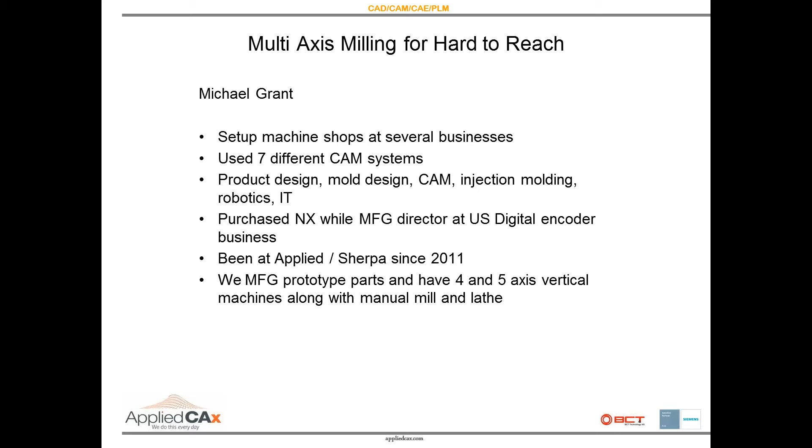Our experience here, what we do here, is more prototype. Complex parts all over the place, not necessarily one type of product. So we do anywhere from vacuum molds to complex fixtures, and aerospace. We cover pretty much all the industries. That definitely helps us see the different challenges.

And keeps it fun. One of the fun projects I've been working on lately is taking a vacuum mold that someone else made that needs modified, doing CMM and then doing modifications on it. Not everything's designed on it, so having to add features, and also finding that some faces are off as much as 40 to 50 thousandths per side, but able to finish that up with just matching everything up. And I'm really enjoying that.

I like facing new challenges. So I'm not an expert in everything, and I definitely learn from you guys all the time. Keep an open mind - I'm not here to tell you there's only one way. I just like to share what I know, share my experience, and hopefully you get something from that. It's always great to brainstorm. So anytime you have deeper questions, or want to look deeper into your situation, definitely reach out to us, and we can partner with you and work through it.

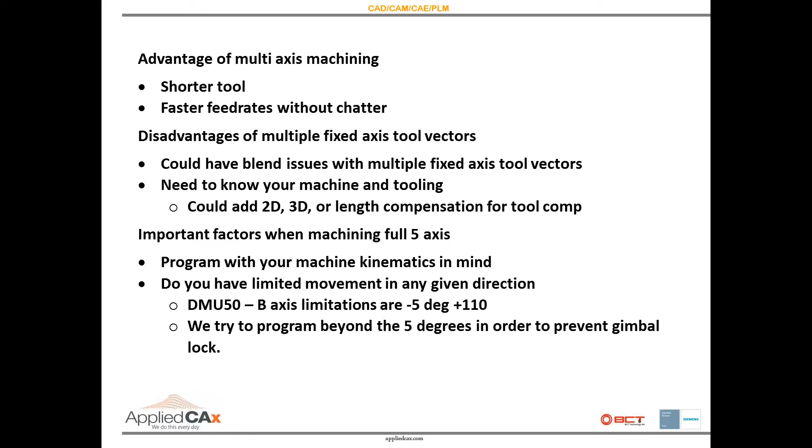But yeah, that's pretty much all I've got for the slides. I know how much people enjoy slides, or how much I enjoy slides, but just wanted to give some important points there.

So one of the challenges in demonstrations is finding - we have some really cool projects we work on that I'd love to share, but they're customer products. So I tend to go out to GrabCAD and look for some non-licensed models that I can share, and then I can modify them from there, of course, with NX. So here I've got a mold with some deep pockets, small radiuses, hard to reach areas. There's certainly situations where you would also use this on something where your movement's outside of a cavity, maybe a core or an aerospace type of part.

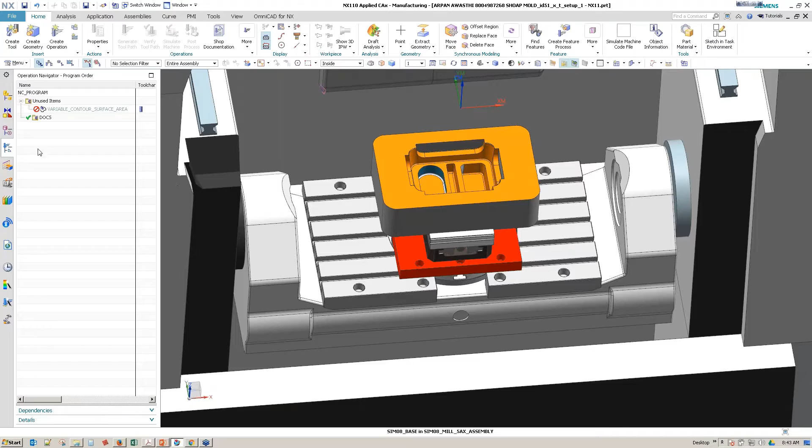But here, as you can see, I have it set up in a simulation kit. So this is a sim kit attached to the setup file for NX. So this has the kinematics, the post all attached, and they're communicating with each other. And this really improves the way that it resolves kinematics and shortest moves. So this is G-code simulation. It's not simulating the internal code.

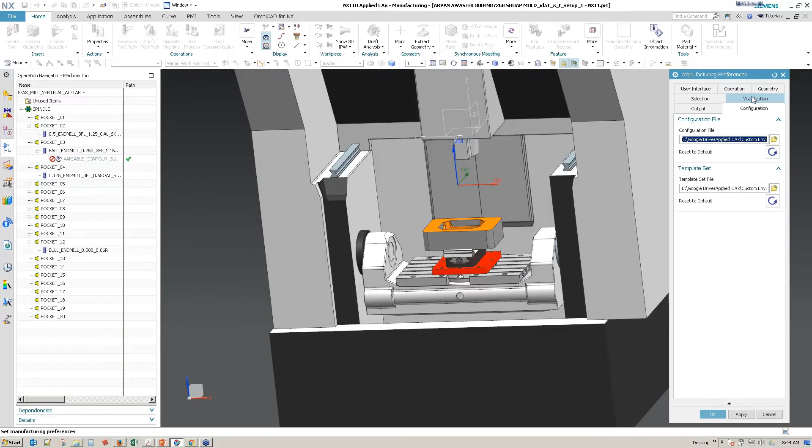And just to show for those who haven't seen it here, a little movement. So you got all your kinematics movement here in this particular kit. This is a table-table, so both rotaries are on the table. NX also allows you to look at your movements prior to doing a toolpath. So some people find this helpful for looking at your tool length and what tool might be best to get into a certain area.

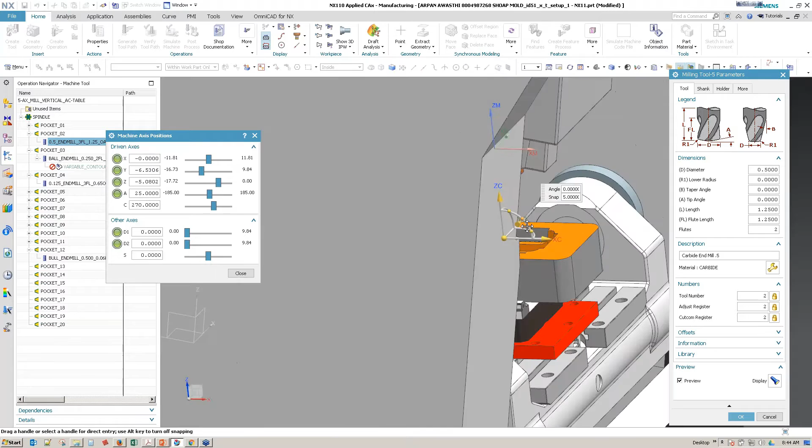So here I just double-clicked on a tool in my tool navigator where I can see all the tools I have assigned to different pockets of the machine. And as I drag this around, the machine's actually moving with it. So if I wanted to see what it might look like, I'll hide it for a moment to get down in here. Of course, this isn't the cutter I would use, but it just gives you an idea of, hey, is my holder going to have any collision issues? Is the tool long enough? What size?

It just gives you some diagnostics to look at, and this might be handy even for quoting. Setting up this file in here, it can be a template, so it's not difficult. So if you're not familiar with that part of NX, certainly let us know, and we can demonstrate more about the simulation kit, as we call it. But that's not what I'm really getting into here. Just wanted to give a little short overview.

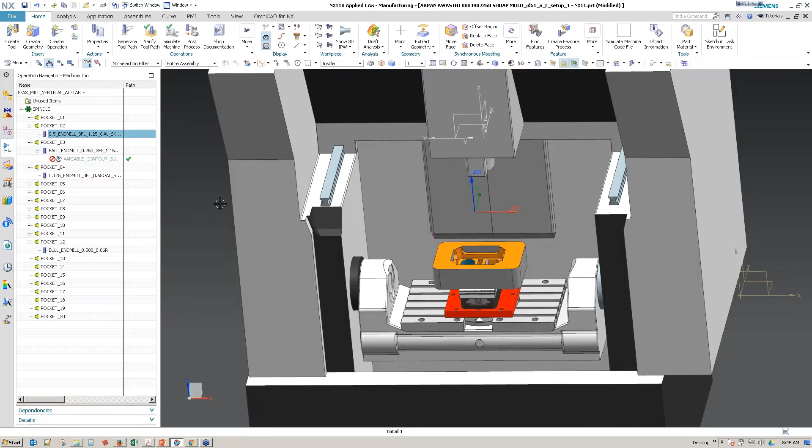So here we're going to look at different ways of creating your multi-axis tool vectors. We've got this closed half-open pocket here. It's got the wall there with a small radius. So this is a little bit challenging to reach, certainly in the case of maybe a 3-axis machine where your cutter is going to be much longer. You're going to want a smaller radius, probably a ball mill to be able to go up that wall.

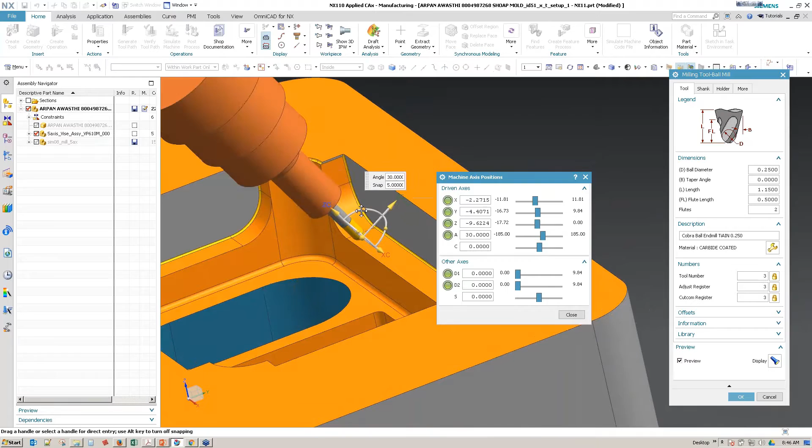So a 5-axis can be handy in this situation, just to be able to tilt. You could resolve this with fixed-axis machining where you just tilt enough to get your holder away from the wall and then work it down. So I'll start there, and then we'll dive into the full 5-axis. Kind of work our way down here.

So I've got this set up so that we don't have to go over roughing. I've just got the part set up; of course, it's seeing the 3D geometry for the part, and then for the blank, I just have offset from part, kind of like if you had gotten a casting. So what we normally do in this situation is we'd work it down with a ball mill, and then in the end, we would do a smaller ball mill tilted until we get that blend down.

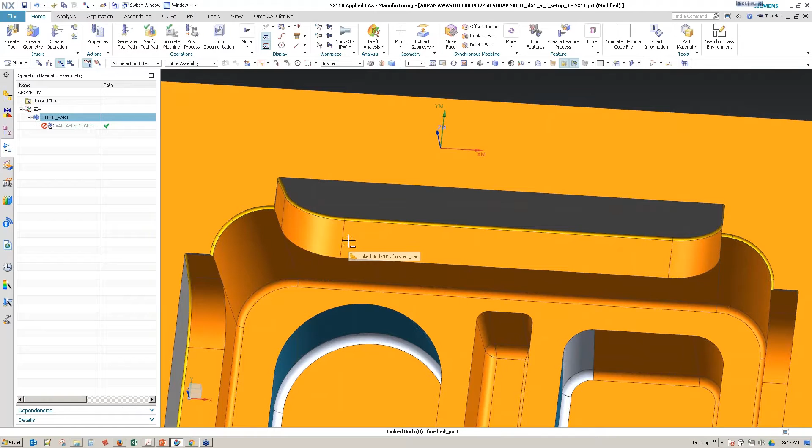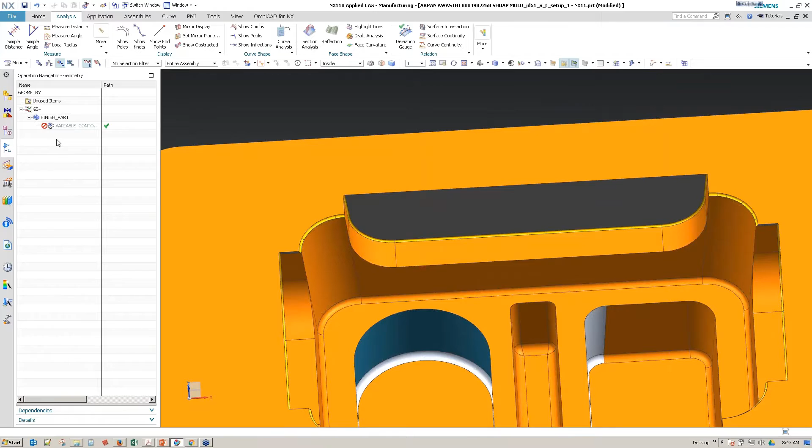Of course, if we had to work that down, let's look at what size that is. So a 32nd. So if we had to work it down to a 16th, that's a situation where we wouldn't use fixed axis. But I use fixed axis wherever I can, just because your speeds are going to be faster. You're not having to sync all the different kinematics, the tables or the rotaries. So wherever we can do fixed axis machining, 3+2, we do that, and then use the multi-axis as needed.

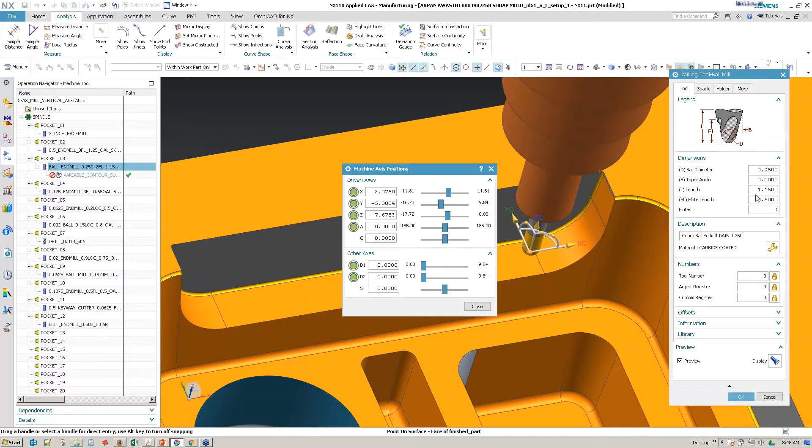So I'll go ahead and choose the 1/4-inch ball mill to start with. Expand them out here. Alright, so looking at the length, I thought it looked okay. We've got 1 and 150 thou inches, so 1.15 inches. So we'll go ahead and use that, and we'll just use an area mill in this case.

So I'll go new operation under contour, and we'll pick fixed axis area mill. I would use a streamline because you have nice flow curves here, or you could use just a straight area mill. We'll try the area mill and see how that works on this one.

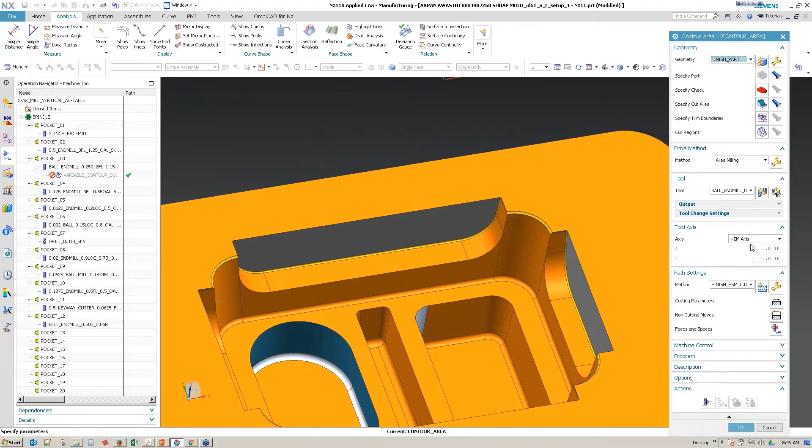So we'll pick our cutting area, and then we'll go ahead and set the tool axis. So under tool axis, you can specify a vector, and then you could select curve or faces. I'm going to go ahead and use dynamic. And so now you could just select,

this is kind of the axis here. You can select a sphere and move it closer to what you're machining, and then you can tilt either by dragging the tilt vector, or if you select that sphere there, you can enter an angle. So I can enter 30 degrees and try that.

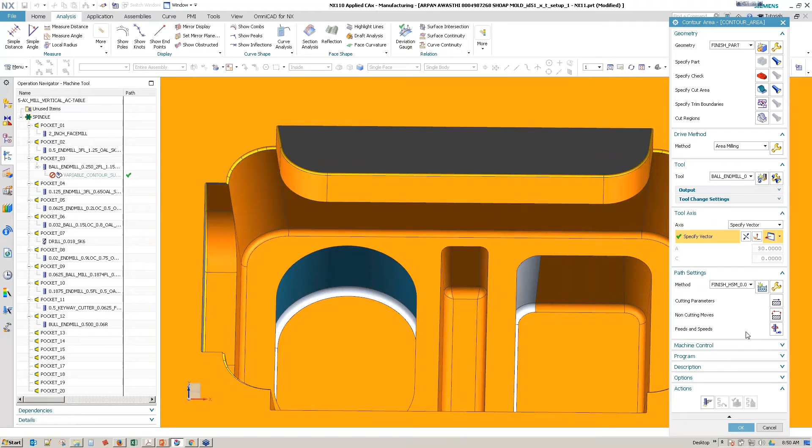You can actually, and I find this kind of cool, in some situations you can set it to the view that you're looking at. So you can go to specify vector and just say, my view direction. So if I'm looking like this and I select that, now you'll see the vector here. There we go, I reversed it. So it's just what angle I was looking at it. But in this case, we'll use dynamic, and we'll set it to 30 degrees.

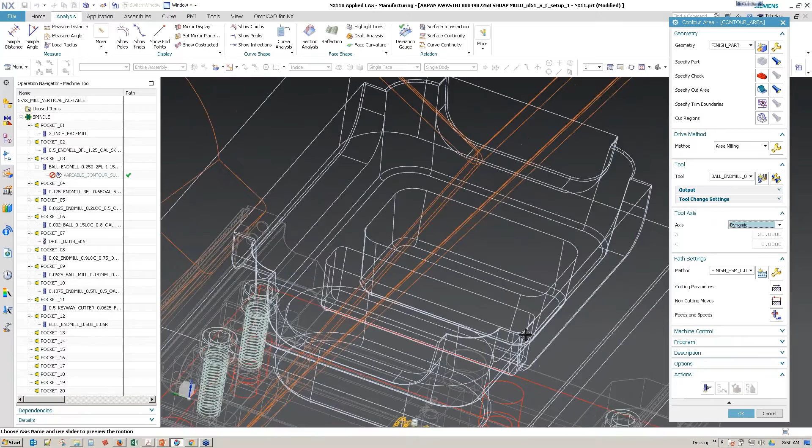Another trick I use when I'm setting vectors, not in every situation, but in some situations, I like to have visibility to what vector I have it set to, and be able to adjust it without going into the toolpath, or if I'm going to use that vector again, I have something to reference. So I actually add a datum CSYS. So under the center area, you have datum CSYS geometry, and I just go ahead and add a CSYS that brings in your vectors, planes, and actually a point at the datum 0.

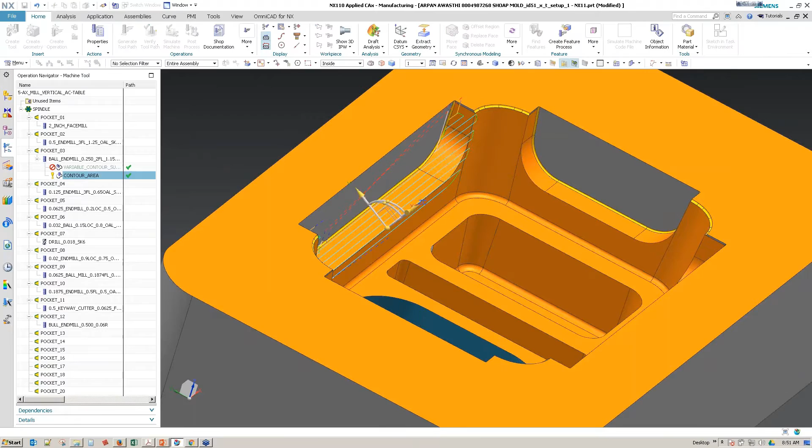And so now if I set this to 30 degrees, and I go into my toolpath and say specify vector, I can select the Z and then generate. Of course, my step over right now might not be ideal, but if I go and change that vector, and I say, I want less 5 degrees, so now I'm at 25. My toolpath now needs regenerated, it realizes that there's been a change. So this is actually changing the vector inside the toolpath. So that's one trick I use.

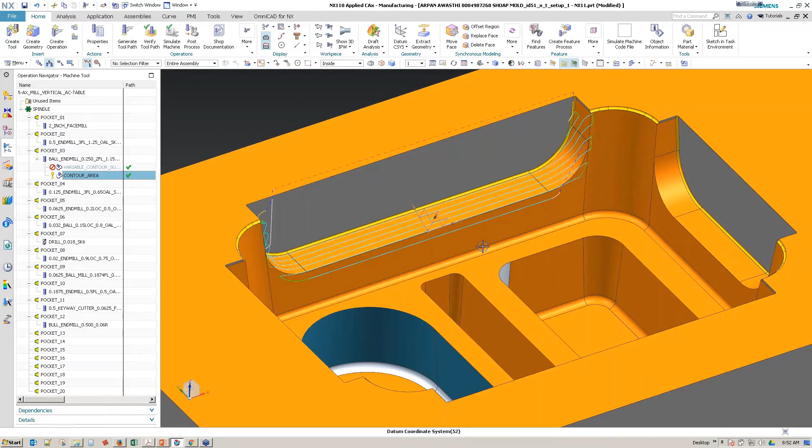I try to use geometry whenever I can, so I have history and I have something to go back and troubleshoot if there's any issues. Not something that's hidden inside the toolpath, but something that's actually a feature. I find this also handy for mirroring toolpaths. I've had certain customers have issues with mirroring and they didn't have any way to really diagnose what caused it because it was internal to the toolpath. They were working on a large Pelton wheel. So by switching to this kind of system, they're sure that it's going to be relative to their system coordinates, and they also have something they can go back and troubleshoot if they have issues.

So as you can see here with area mill, it doesn't follow the geometry. It doesn't do a great job of that because we have so much curvature. Even if I set it to something like follow periphery. So go ahead and generate that. You get a little bit of an interesting pattern. With NX11, this has been improved so that it will clean up these areas where you're getting different step over amounts. So here we've gone and cleaned up those areas, but that's why something that uses the flow curves of the geometry can be much better.

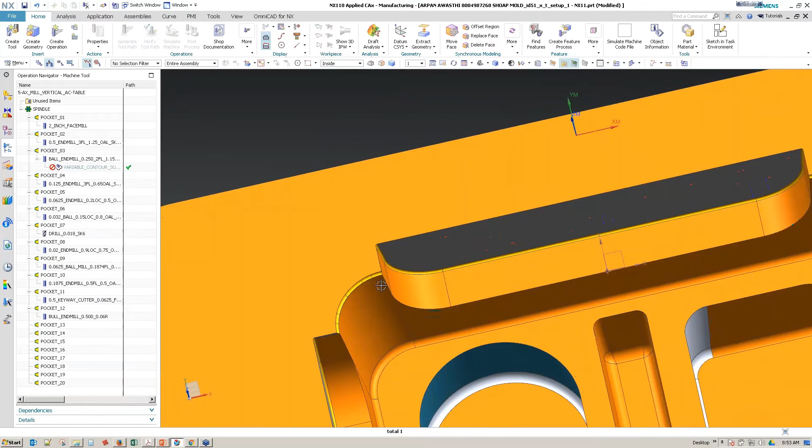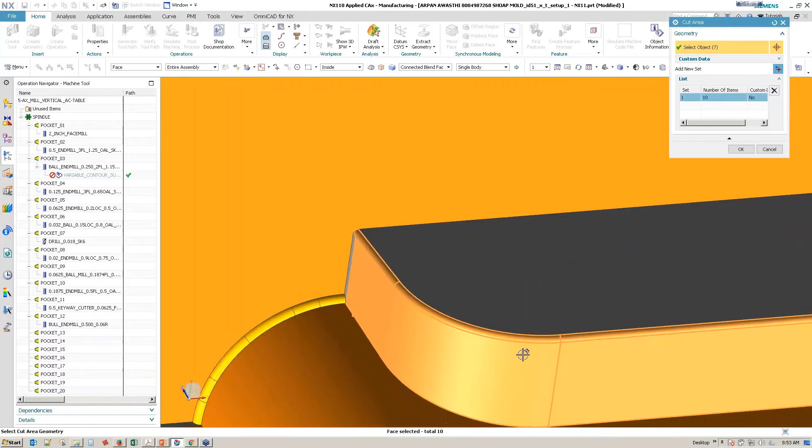So for comparison, we'll go and use a streamline. And I am going through this rather quickly. This is kind of geared towards people already using NX, and for those who haven't, you can get more familiar with the tools, but you might need kind of a deeper dive into how did you do all that.

So we'll go ahead and with the streamline, it creates some cross and flow curves. So it really follows the shape of the part well. And you can also have it extend off the edges. Let's look at the toolpath here. So you can see, we're going up beyond the geometry right now. You can smooth these rapids.

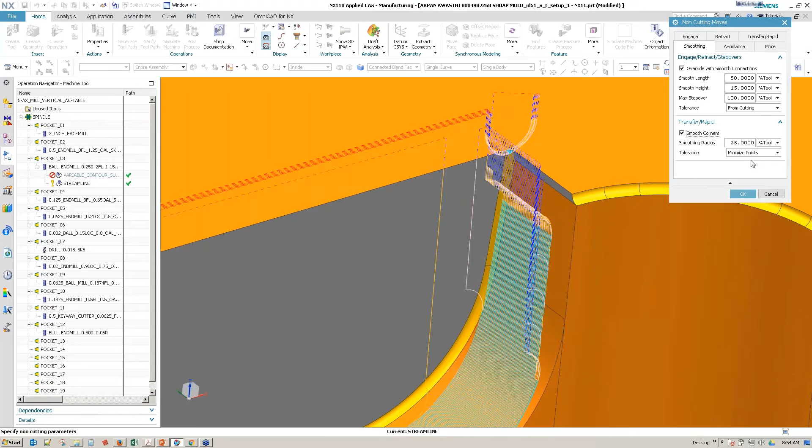What I tend to use is under smoothing. I like to have both the engage and retract and the transfer set up with smoothing turned on, and so it just does a little bit better job of eliminating and creating smooth arcs. You can also... I can see that this goes up a little higher, so it's trying to machine up in there.

So there's a couple different ways to actually create the projection vector and the way that it projects the toolpath to the part. So I switched to on. Tangent to can cause issues when you have small areas that are smaller than the cutter.

I don't have time to go over all of the specifics, but I will say that the help is great. If you want to see more about this area here, as far as the tool position and what that all means in regards to on, tangent to, and contact, if you simply select F1 while in NX, it'll open up the area of help that relates to what you're doing.

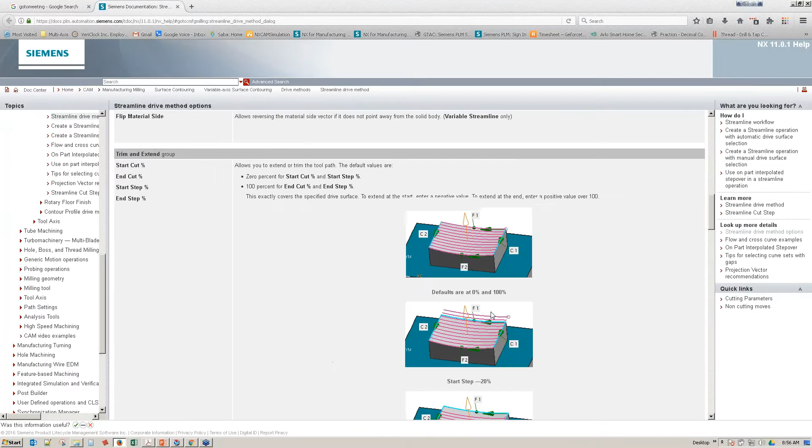Sometimes it might not be on the exact page, but in this case, it is. There are certain situations where the topic will be a subtopic because there's a lot on that particular dialogue. But here it talks about the on, tangent to, and contact. And then there's a couple others I saved that show some great diagrams. So this was created from NX help.

So definitely go in. This one's called tool position. So if you search NX help, it's a little bit better quality than when I converted it, but it shows all the different tool position methods, how they affect the toolpath and what's best to use. So we'll go back here.

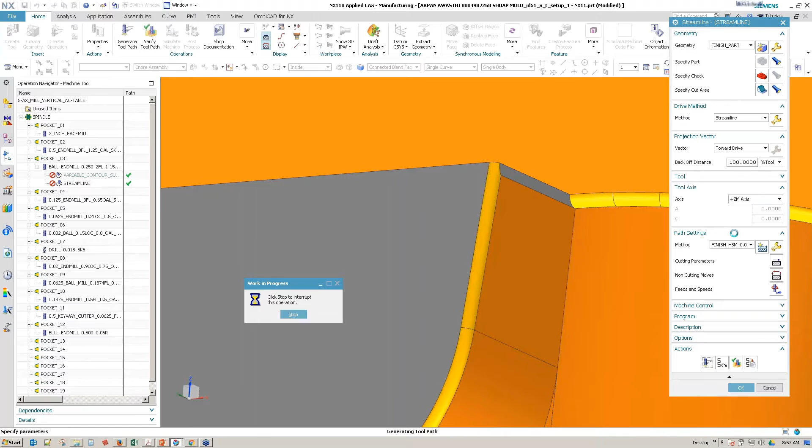As far as projection vector, I tend to use normal to drive and towards drive. Towards drive is good for cavities, and normal to drive is good for outside surfaces. All right, so let's get down to it. Let's do a smaller tool on this. So we'll say OK.

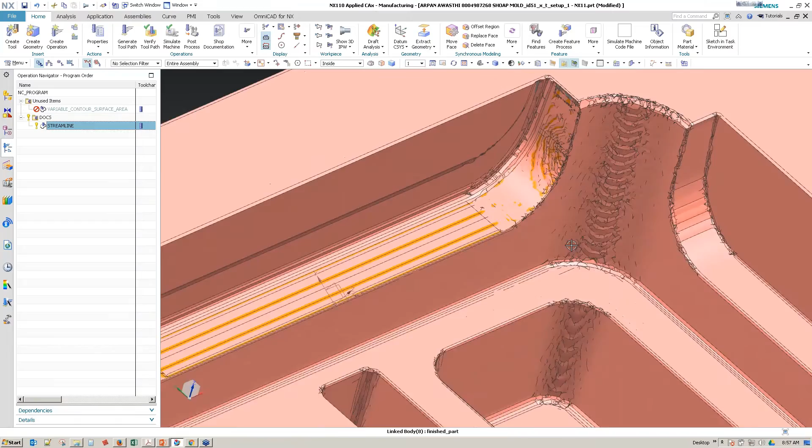And we can look at where this operation's at in regards to others. I can look at what my material removal situation is just by clicking on Show 3D IPW. And so this gives a quick preview of what we've done and what's still left to machine.

Another way to look at that, of course you can do that with 3D Verify, but these are just quick tools I use while creating toolpaths because I tend to not do the really deep analysis until I've got the toolpaths laid out in the order that I like, and then I'll start diving deeper.

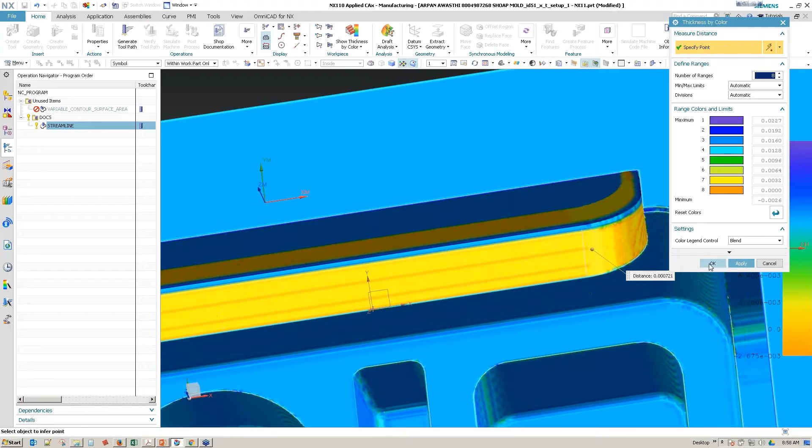But as I'm creating them, I like to use this tool in order to have a quick picture of what material's left, so I can click on the faces and see what I've got left. So I'll just say OK, and obviously we need to have some radius material here to clean up. I skipped the vertical wall because I just want to focus on the multi-axis.

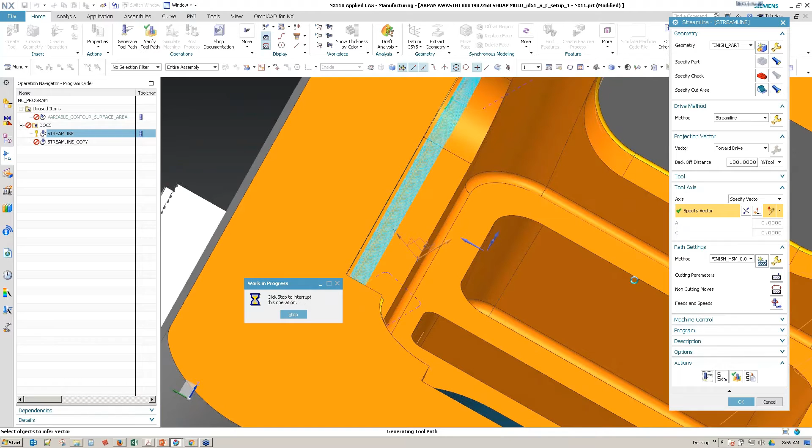So if I wanted to go back to this, I would just copy and paste, and it looks like I didn't set the tool axis back here. There we go. And so now if I preview that, you can see that it's tilted away.

And then in the worst case here, we can look at if there's any collision, and there isn't. So this definitely helped us. We could even shorten that tool more, tilt more, but I just want to move quickly and keep this going. So the one I copied here didn't have the tilt, so I'm going to delete that and recopy the toolpath. And then we'll just change the cutter.

Of course, you would change the step over. I have this all doing finishing. You would want to step that through like semi-finish, finish. Oh, and the other thing I would do, sorry, is limit the area that I'm machining.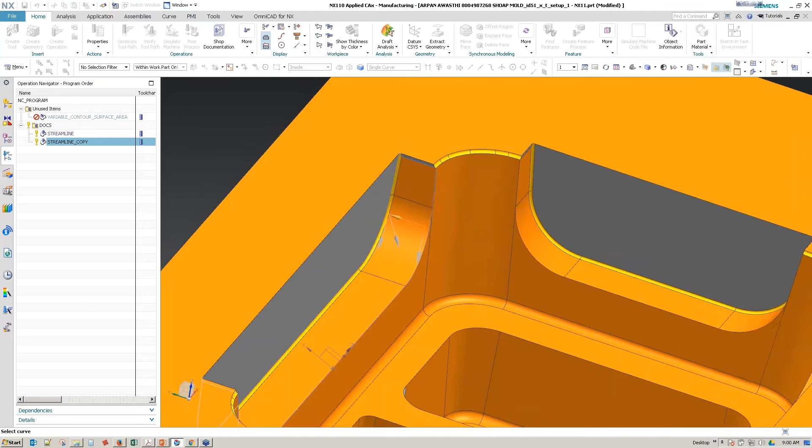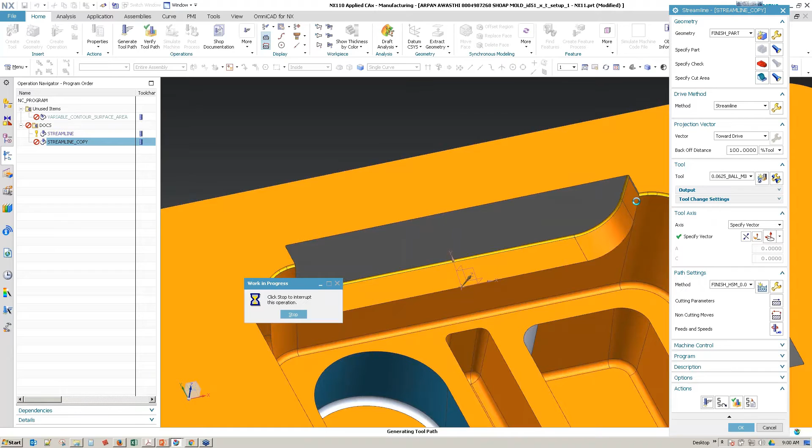So in Streamline, as long as you know where you're starting, so I'll say I'm starting out here, you can do a trim. You can also have it recognize what material's left, or I could just select the fillet area. What I tend to do, and I can show that real quick, the tip I'll show is adding a trim, a division line on the actual face.

The reason I do that is anytime you're adding the ability to look at rest material, you're adding time to your toolpath generation, and I know all of us like to keep that low. So what I tend to use is creating some curves on the face.

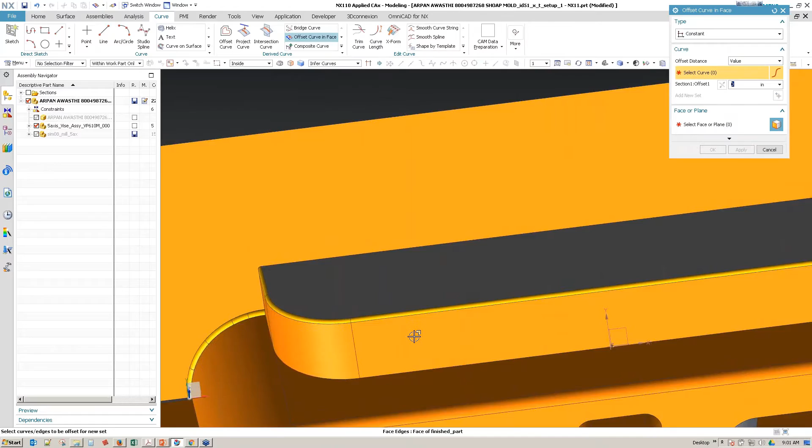There are ways to do it without going into modeling, but the tool I tend to use is inside of modeling. One of them you can use is, let's see here, sorry, under curve, offset curve in face. You just pick your face that you want to offset, and then, oh sorry, pick the curve. We'll extract, you'd have to extract the curve first.

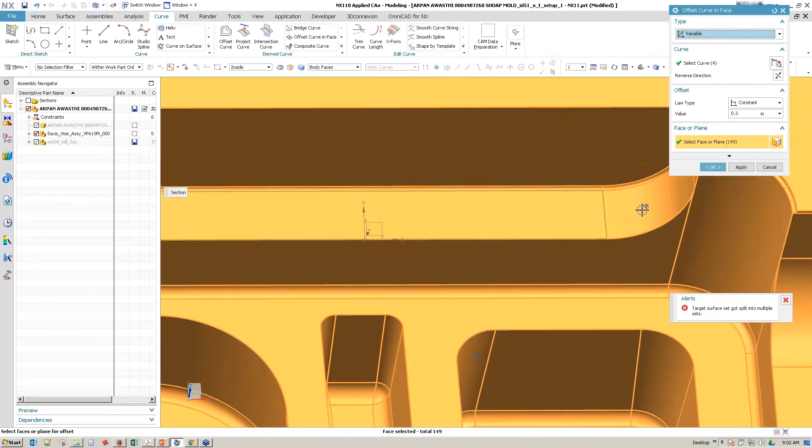Alright, let's see. So I'm clicking on extract curve, and then we'll go back into offset curve in face. I'm going to pick the face but not tangent. We just want to pick single faces here. And then the curve we want to offset.

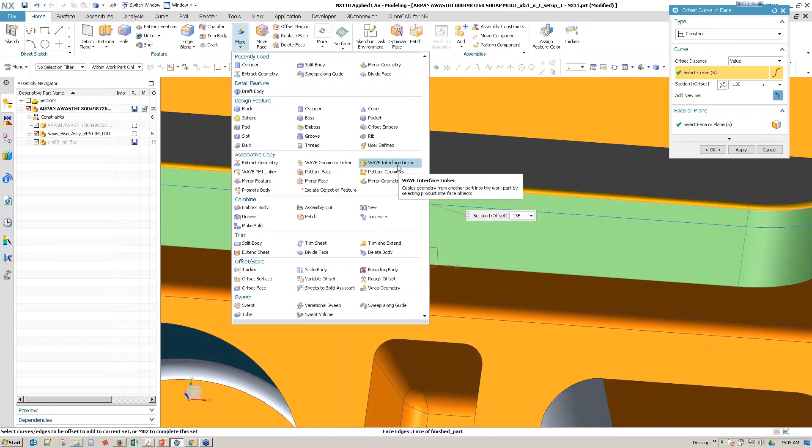And then you can just drag it to, what I tend to do is, let's say we used a 1/4 inch, so we'd want to go out like 135 and start there. So I get a little nervous sometimes during the webinar and stumble, but just extracting the curve there with extract geometry, and you could certainly bring that out onto your toolbar, but then you just set the distance, and when you say okay, you have that curve there, and you can pick that as a trim, or you can divide your face and then just pick that as the divided face.

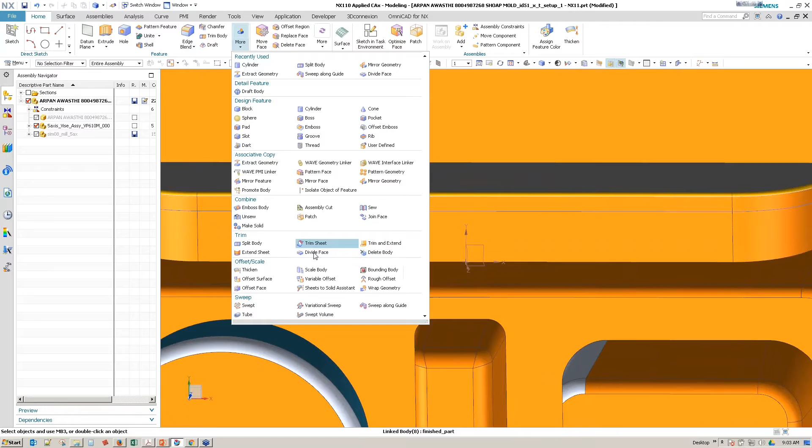So if we go to divide face, we'll just do one of them here and pick the line. Pick along vector, and then we've got a separate face there. So we use that, or inside of the toolpath itself, you can just use the trim amount. So inside of streamline, you can set your trim and then generate. And you'd want to go along the other vector, but you can trim it either way. You can trim it along the U or the V.

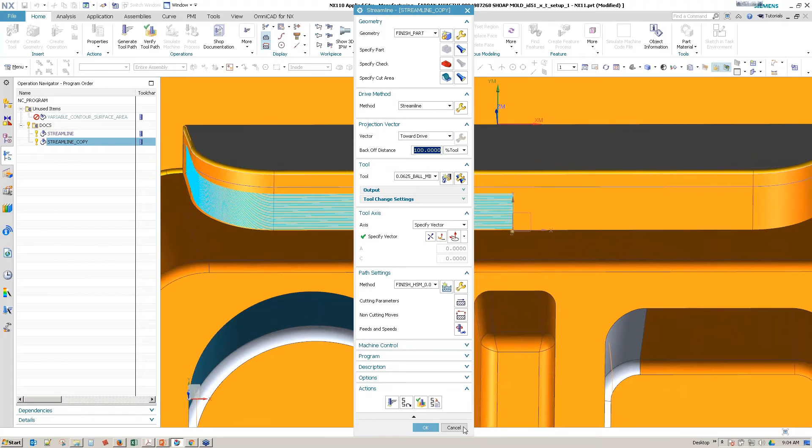Alright, so if you want to do a small cutter multi-axis, I would do towards line, so we'll add that. So we'll go to mill multi-axis. We'll go ahead and use the same cutter. And then we want to do projection vector still towards drive, and tool axis, I'm going to say towards point. I'll come back to that. I'm going to go ahead and move that datum or add another one here. I'll hide the one that we added.

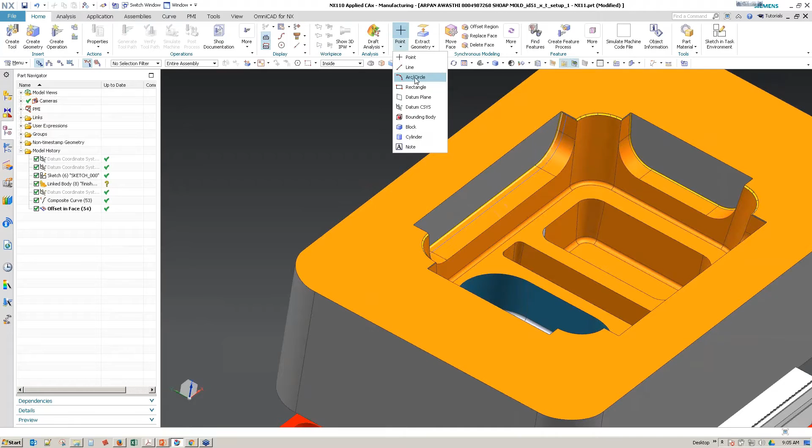So we'll try something like that. You can also do it by a distance. So we'll pick that point there, and then pick our surface to machine. With the surfaces, I would put those in a geometry group so that you don't have to keep reselecting them. It basically is like a container. When you drag operations under it, it knows what faces you want to machine. So with that method, you would only pick the faces once. And then we'll set our step over. Zigzag would be fine.

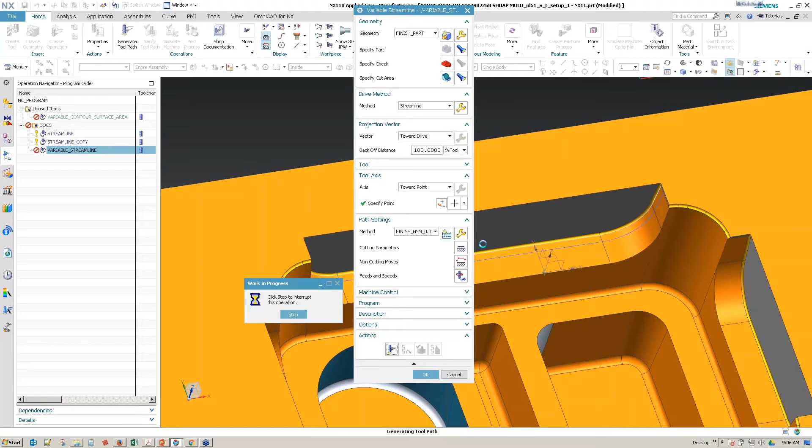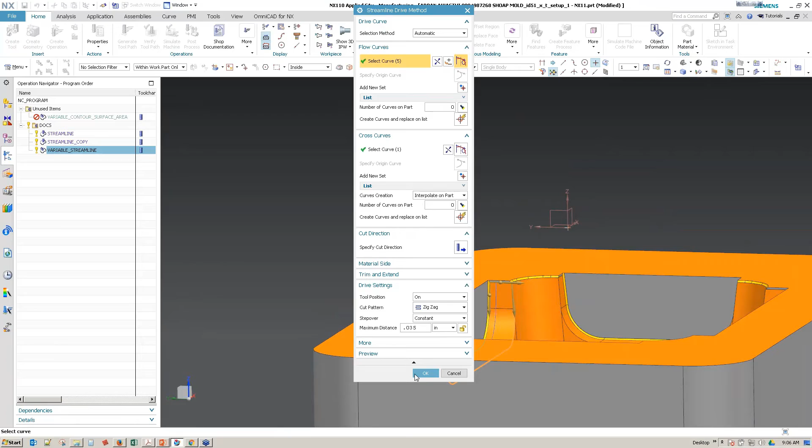And then next we'll cover a little bit of contour profile. So I could have done a smaller step over to kind of troubleshoot this, but just to make sure that our tool vector is enough. So I would actually have that steeper. So we'll go ahead and set that up a little higher there. And then regenerate. So now you can see you're getting a little less tilt. So yeah, you have a lot of control and visibility to where you're tilting to.

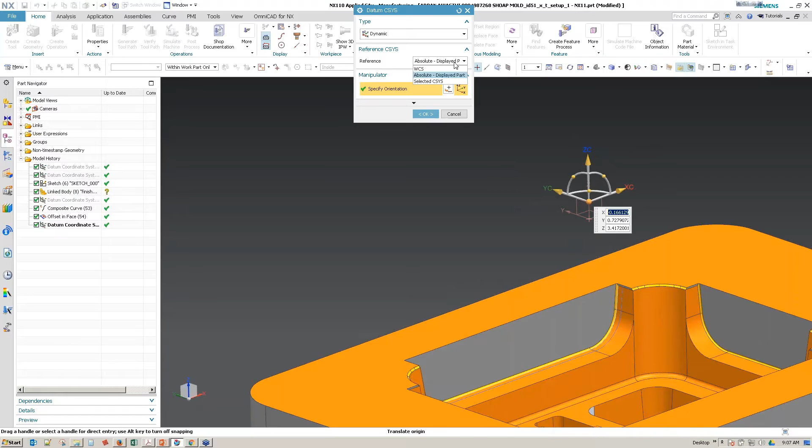If you wanted to move that by an amount, when you double click it in your tree, if you just click on one of the cones, you can say I want to go up an inch, or I want to go down an inch. You can also set it a distance from your absolute or from your work coordinate system. So there's ways to do that rather than just dragging it around. So that is a variable streamline with towards point, and the projection vector is towards drive, and the drive method is streamline.

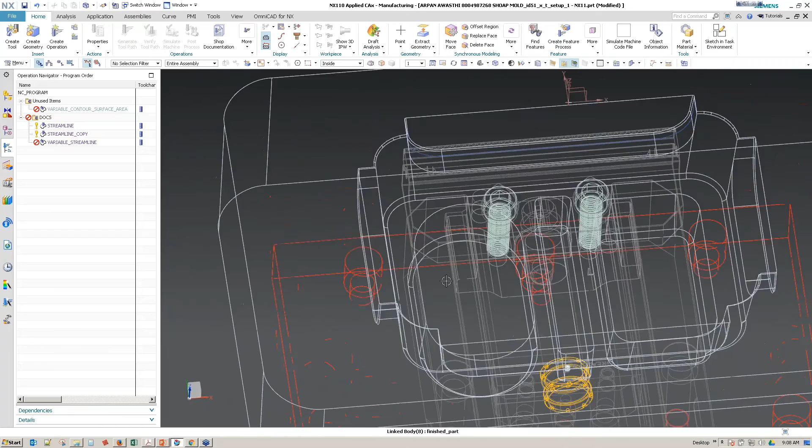So down in these deeper pockets, we'd want to look at the radius, and I went ahead and made this an undercut, and like I said, I downloaded this and did all the changes in NX. Looks like I created it into a body, but these came in without being undercuts, and I was able to use synchronous modeling to create those undercuts. So if I wanted to analyze the radius, just click on it there. It's about an 1/8 inch radius, so 1/4 inch cutter would work.

I tend to like those over the radius of the cutter though, so if I'm using a 1/4 inch cutter, I would set the radius at like 135. So we can go ahead and do that using synchronous. I know some situations you're not going to be able to do that, but this particular blend is a B surface, so I need to convert it into a non-B surface. So while I convert that, I'm going to go ahead and change the size of it. And so now we could use that 1/4 inch. I've done it before with also a 3/8.

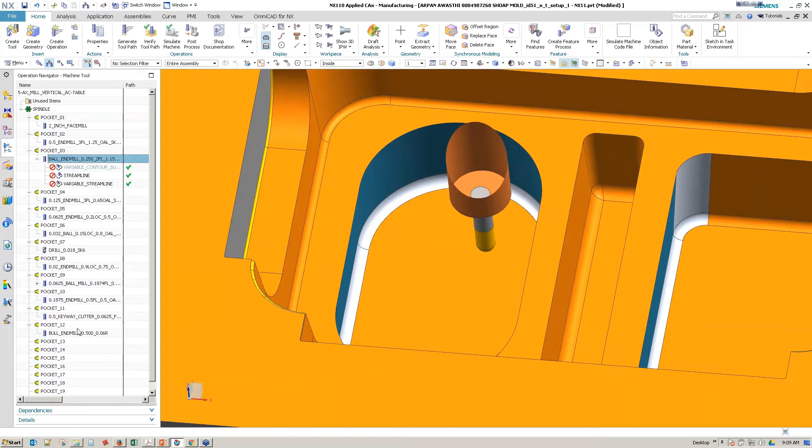So we'll go ahead, I think I do have the 3/8 in here also. All right, well, we'll use the 1/4 inch.

All right, so we'll create a contour profile. This is a particular toolpath I use often, nice and easy to generate, probably the easiest to create a 5-axis toolpath. So under mill multi-axis, you can see this contour profile.

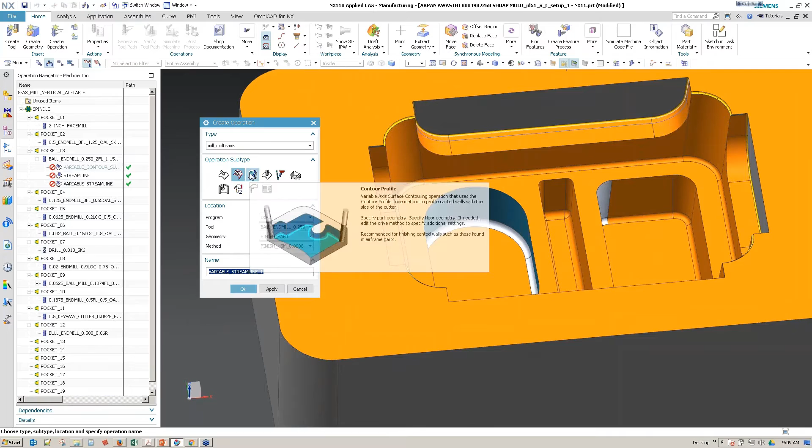With the method here, I usually set different methods with different tolerances. Basically, that's what those are reflecting, the tolerance level. I find with smaller cutters, I go to a tighter tolerance, and then our DMU50 converts that into smooth splines if it's a point-to-point toolpath.

All right, so we'll go ahead and pick the floor, and then it will automatically pick the walls. Other than that, we'll just generate it. And so right there, we already have a multi-axis toolpath.

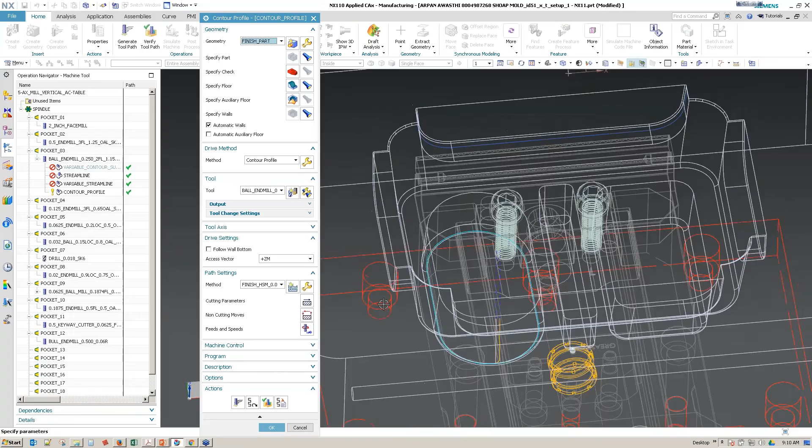One click, so it's tilting. It's obviously too short, so we'll extend that cutter. And if I had to extend it, let's look at the depth there to see.

So one way to, when you do analysis and keep the dimension associative and be able to see it without having to measure again, is to use the PMI, product manufacturing information. It's like 3D dimensioning. So if I pick those two faces, I can just set the dimension out to the side.

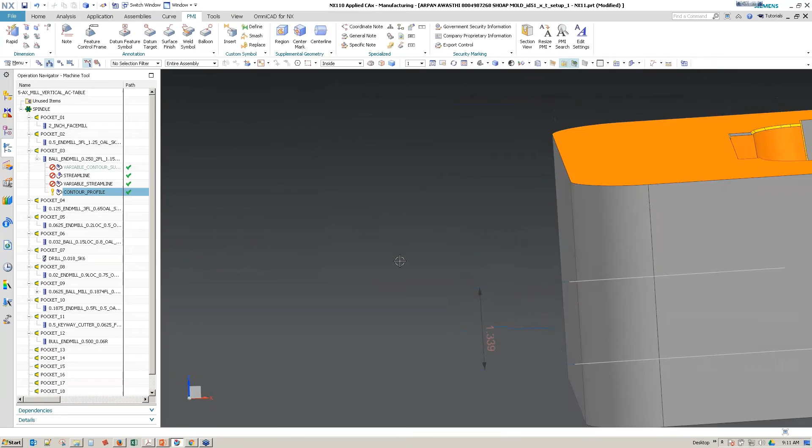So we have 1.339 as our, so it's not too bad length ratio. I mean, it would be nice to be able to go up a size, but we'll just go ahead and extend that cutter. So I can select on the bottom surface.

So I just double click the tool. I'm not in an operation, and using that same thesis that we're seeing over and over again, I can drag my cutter around. I can make it relative to a point on face. I can tilt it relative to like a curve. So you have a lot of control for analysis.

Yeah, let's go ahead and tilt it. All right, and then I like to switch to wireframe. We'll look at a normal view here. So while I'm looking at it in that view,

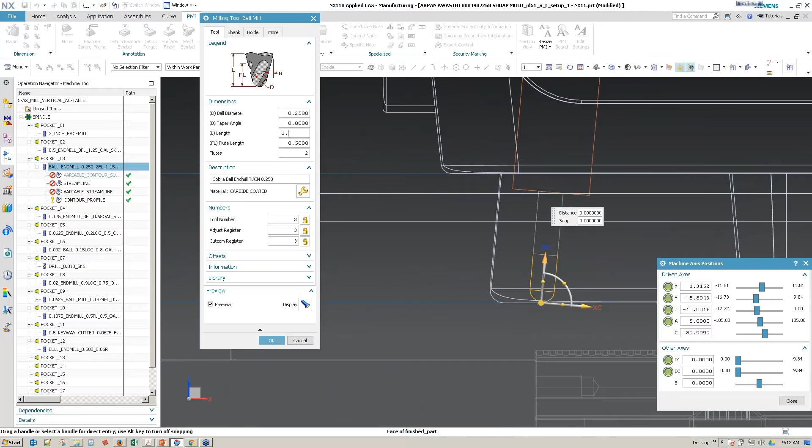something like 1.4 inches. Of course, we'd want a longer flute length. I would go up to 3/8 in this case, but which is easy to do.

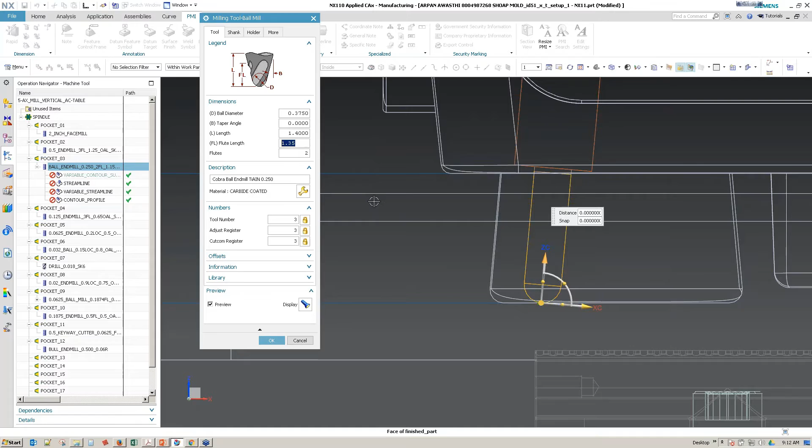And then we'll extend the flute length. There we go. So we'll try that. I'll rename this.

Of course, I'm shortcutting here a little bit. All right, so we'll go ahead and regenerate that. It knows that I've just changed the cutter. I'll go ahead and update that blend, so I can just highlight it and go to details and change it here.

And then generate again. Generation times on this type of toolpath are very fast. And then we can kind of, you can either replay it. Of course, you can turn on collision detection and all that, but that's a little tight.

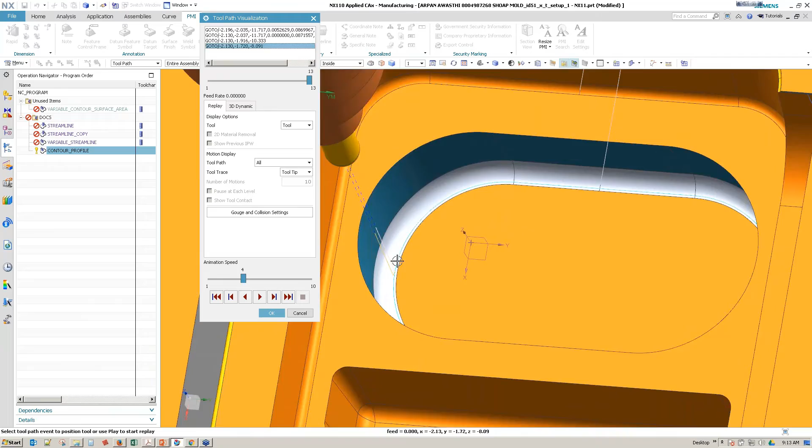But that tends to be how we program here. We definitely run as short as possible, but it looks good.

And then if you wanted to do that in steps, under cutting parameters, you can go to multi-passes and you can set your depth. So that depth was let's say 3/4, and let's say we wanted to do that in 3 passes. And then of course you could do side passes also.

I will say, when we get into very deep pockets, maybe 7 times diameter depth to diameter ratio, we've had issues using this type of toolpath in the corners, especially if the design is, like say a long 1/4 inch cutter and the corners are 1/8. They're exactly half of the cutter.

What I probably should do is try a metric or something that's not an exact match. It's just too much contact when it gets into the corners, so we get chatter. I've experimented with smaller step downs, like maybe 30 thou step downs, which is still much faster than doing it not normal to the wall, just normal to Z.

Well, of course, an undercut you couldn't do, but I'm talking about normal drafts, inward drafts, or positive.

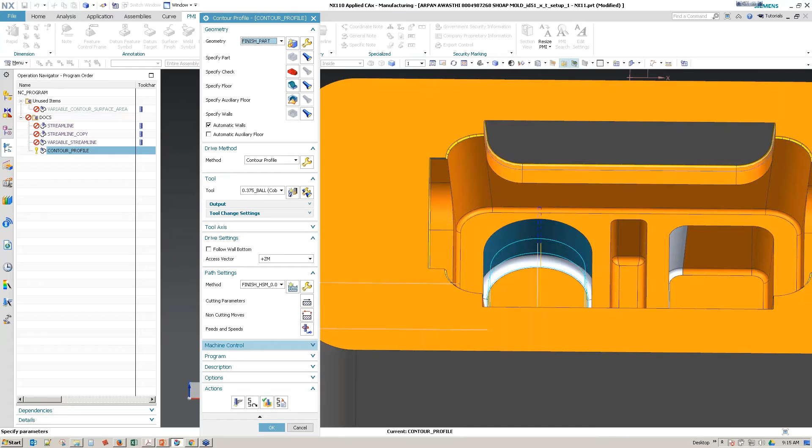It'd certainly be faster than stepping it down 2 thou at a time, but I had to keep the job going, so we ended up doing a normal step down, but that's something I'm going to continue to experiment with.

So here we've got the depths broken up into different moves, and again I like to set this up in my template or standard so I don't have to keep setting it. You can set it as your default. I would set up smoothing, and what it does is smooth the arc away from the wall. Works great, really easy to set.

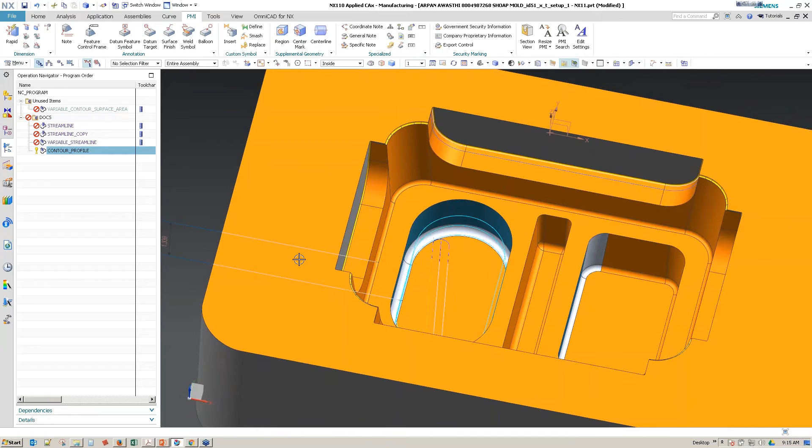So that's a little bit about the contour profile, great operation. In this case we had a floor. If we didn't have a floor, and that was like a through pocket, let me show that here.

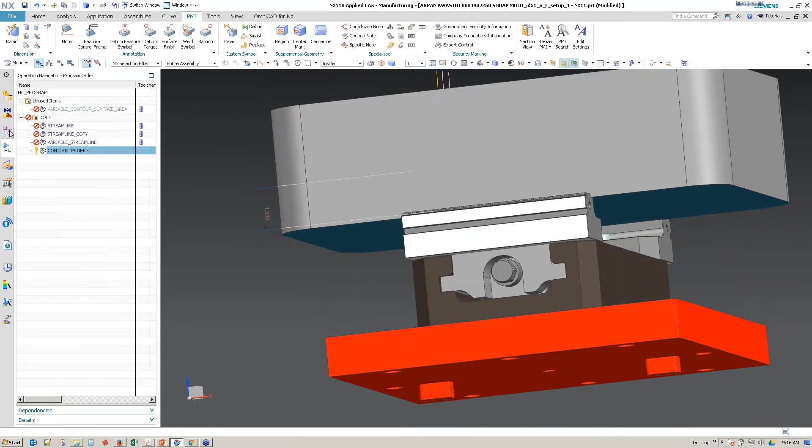So we'll just slice this momentarily here. Oops, did not mean to do that. So I've got it kind of shortened there, and then if I do something like, let's delete these blends.

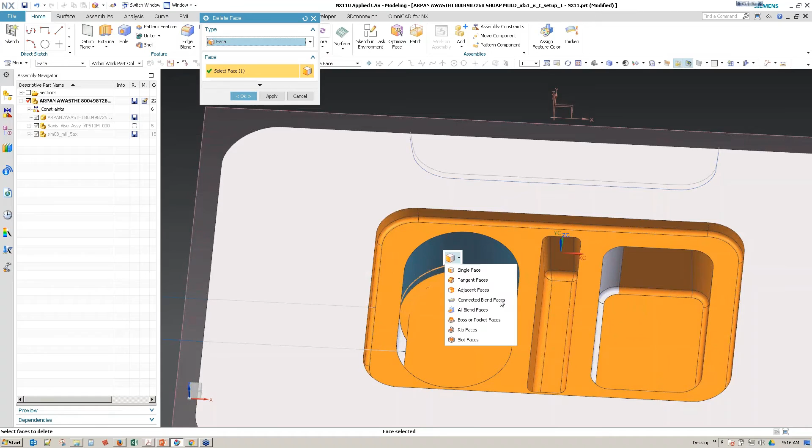All right, so we have a through pocket now, no floor. So in that case...

What you need to do, because now your floor is gone, is use automatic auxiliary floor, and then you'll see it generates. Let's generate it here.

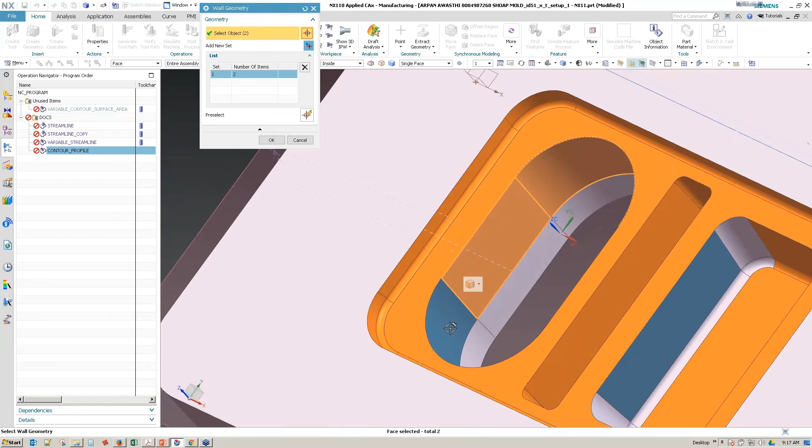Oh, the automatic walls didn't work because it didn't have a floor, so now we have to select the walls. I don't think the negative draft continued, so I'll just do the upper section there.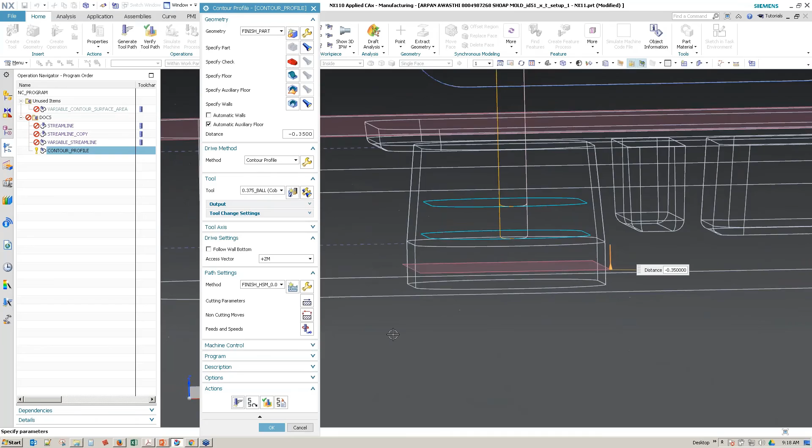Yeah, it sees the wall is not normal to... we can fix that.

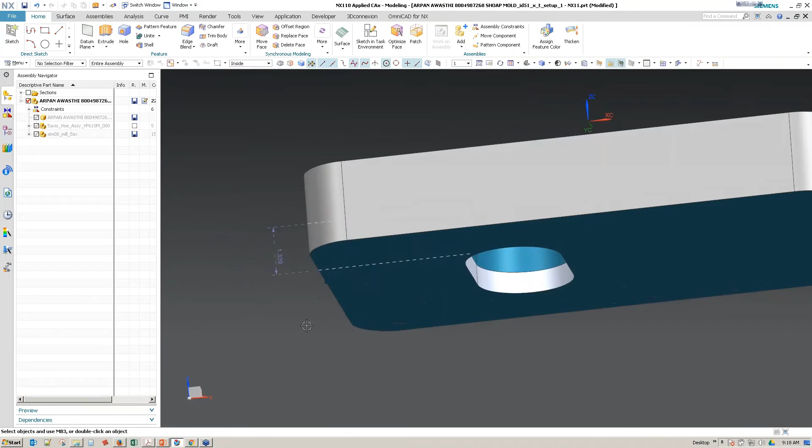Well, actually, we can just bring the bottom of the mold up to that, so let's do that. Let's say there's a plane.

All right, so I'm just hacking away here. I don't have several models, I like to keep to this one just because it's not a customer part.

So now if I generate, I don't think I have collision on, just to keep the toolpath generation going, but you can see we're going beyond the bottom there. So it automatically can create an auxiliary floor.

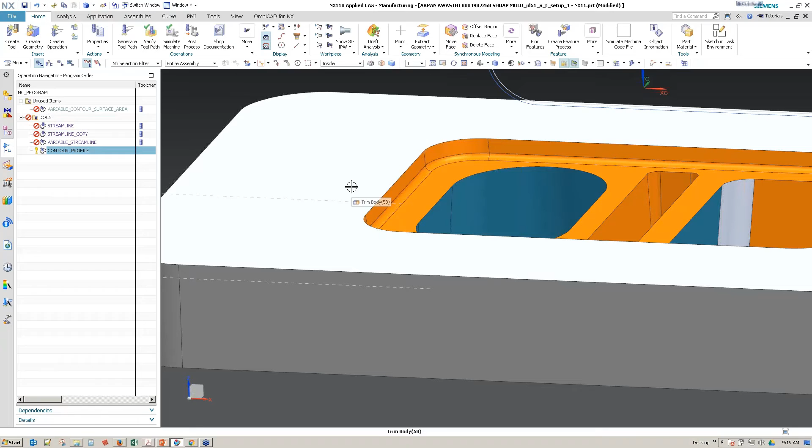I really like this toolpath even for upper sections that aren't continuous, going up. I've had situations where maybe the top section I could do normal to the wall, and then the lower sections were broken up enough I couldn't, but at least I could do the upper portion of the wall very quickly with a contour profile.

Another toolpath that's really good is surface. I'd like to go over the multi-axis surface area contour toolpath. What this toolpath offers that's unique is the ability to drive the multi-axis tool vector based on the drive surface.

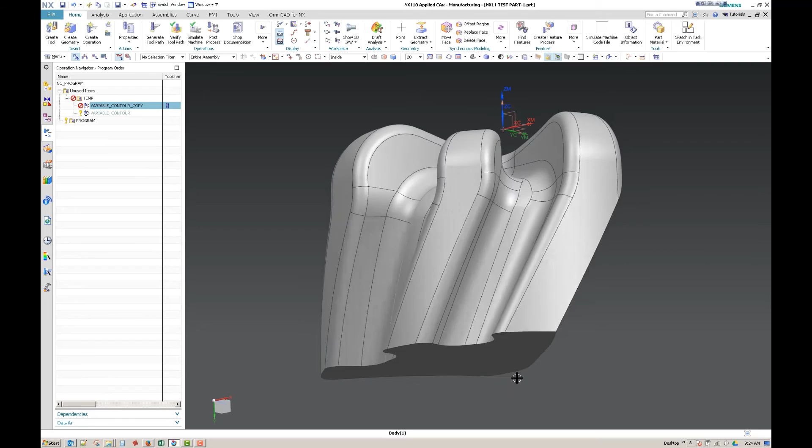On a part like this where you have steep walls joined by a radius, if you had normal to surface, obviously when you're up on this surface, the normal would be facing the other side and you'd have a collision. A part like this you couldn't use normal or away from point, because that won't cover the entire area you need to cut.

Relative to vector wouldn't allow it to follow this. There might be ways you could come up with one that sort of works, but on this type of part, a good tool to have is the surface area.

So I wanted to show how I derive the surface from this part. There's a couple different ways. I'll hide what I've previously done here.

So I'm going to use the extract tool. I'm going to go ahead into modeling and extract geometry using the extract geometry command. I've also added it to my toolbar or ribbon bar.

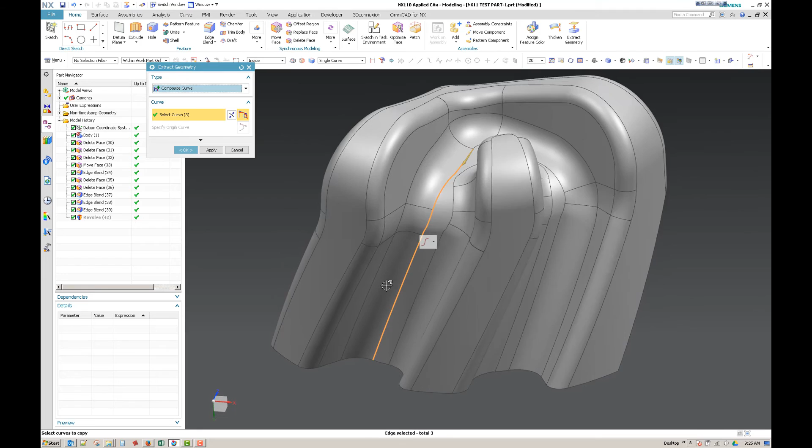So on the composite curve command, I can go ahead and grab these edges, and now I've extracted a curve from those edges. The reason I'm going to do this is because it follows the natural shape of the part.

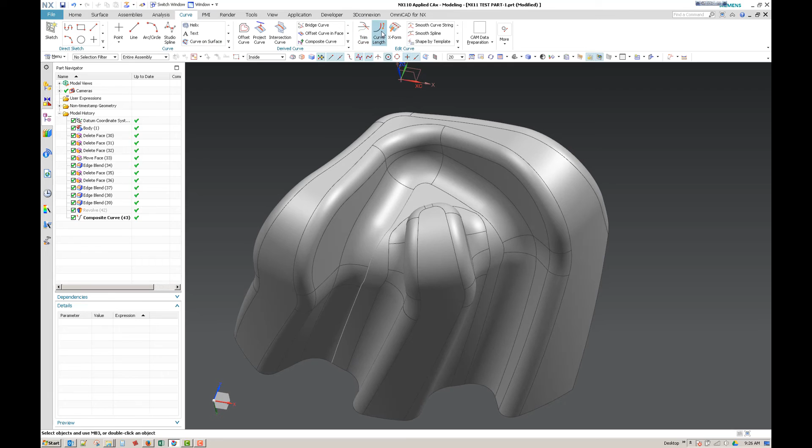This part is revolved around center and also has this curvature on the top. So if I revolve a reference surface about center and follow the shape of the part, I'll get a better tool axis. Now that I've got that, I'm going to use the extend curve command and extend the top of the curve a bit.

So I could just pick the curve and drag an arrow. I'm going to drag it up beyond the area that I'm going to machine. Then you can see that the curve's going up into this area. So now from the home ribbon bar, I'm going to, under extrude, do revolve and pick those curves.

And then for the revolve vector, I'm going to use the datum coordinates, in this case the absolute 0, and it happens to have a datum axis. So I'm pretty happy with that. I just need to be revolved beyond what I'm cutting.

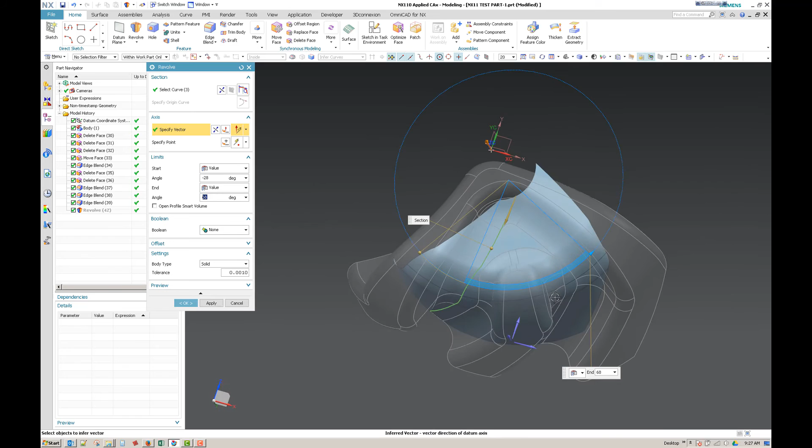The other thing you'll notice here is the shape of the reference surface follows the shape of the part, which will give us a good toolpath shape when doing zigzag. So I'll say OK. I'm on solid and none, so this will create a surface. I'm going to go ahead and hide the main part so that we can see this surface and easily select it from manufacturing. So I'm going to use the variable contour command.

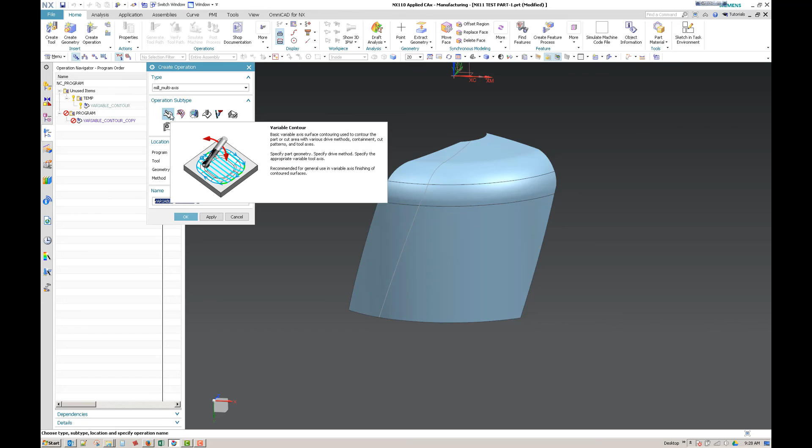I've got a little placeholder here. This would be, if you want to know where you get this from, it'd be under the mill multi-axis type. And then you could choose either this, probably the streamline would work just fine, or the contour, and either one of those, once you select them, the drive method could be set to surface area.

So going back here, we'll go ahead and start with picking the surface area, being that we went ahead and selected to hide our main body. So I'm going to go into specify drive geometry and pick this reference surface. So it'll be 3 surfaces or faces.

And then before I exit this tool, I'm going to pick my cut direction, and you can see again that that follows the shape of the part or the reference surface. I've got zigzag with lifts, and I'm going to do a scallop type cut, tool position tangent to.

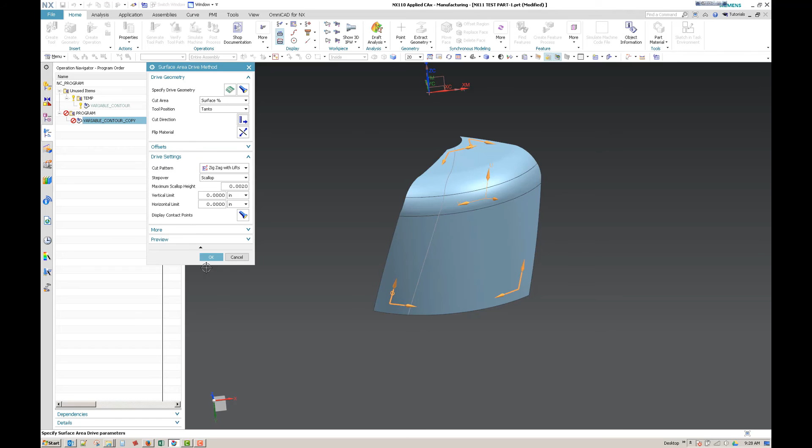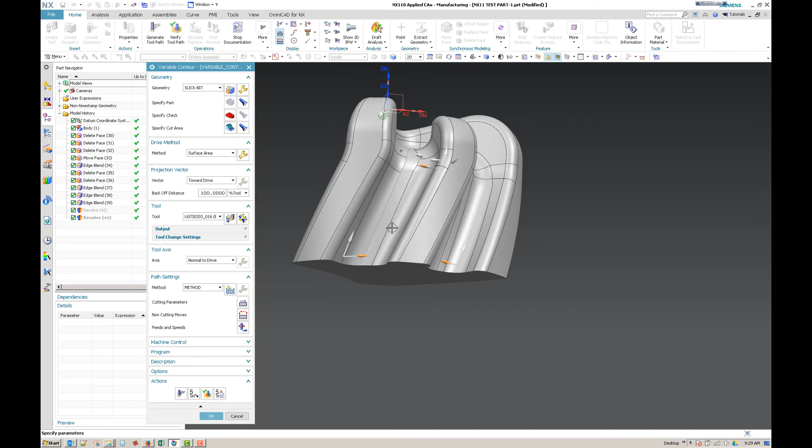So while we're in here, we can show our body, hide the revolve. We've got projection vector towards drive. In this case, normal to drive also works, but while we're in this valley here, this cutout, we're sort of in a cavity. So I went ahead and went with the towards drive.

Tool axis is normal to drive. And then I've also, under non-cutting moves, turned on the smoothing. So we'll go ahead and generate this.

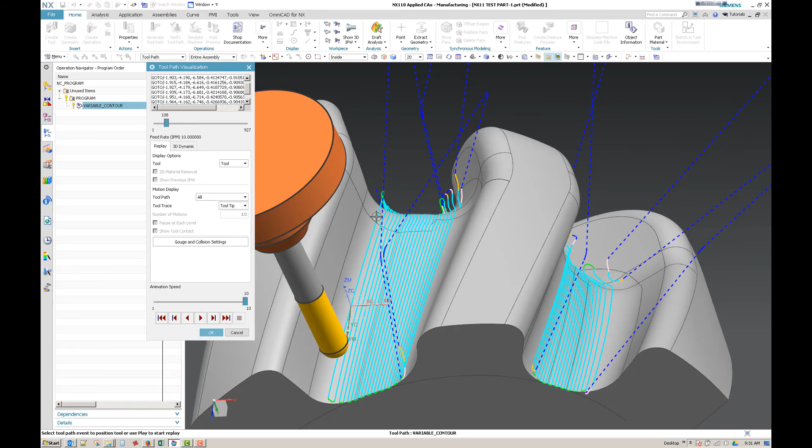And there we have it. So if I go in here and select on this toolpath here, you'll see that our tool axis is very controlled, smooth. It's not jumping around like it would with normal to surface. It's able to come into the top area and machine. It's just able to follow the entire part all the way around, fairly smooth.

This isn't the only toolpath you could use. You could also use a contour profile on this part and run swarf based normal to the walls, but this being able to run your tool axis based on the drive geometry is a very handy tool.

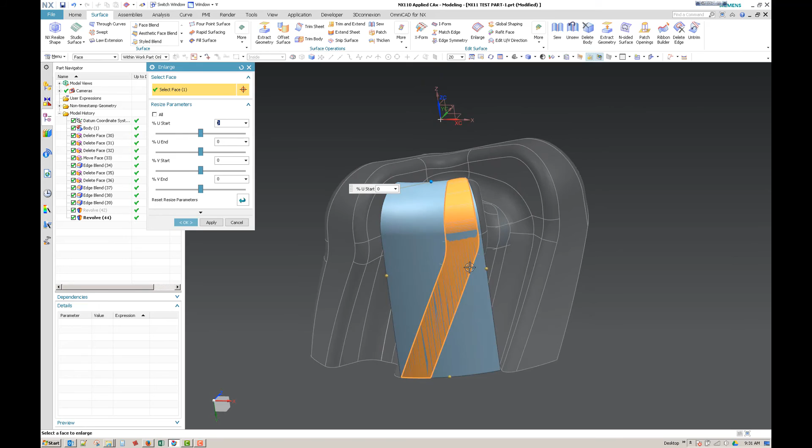You do have, if you get modeling, you have a lot of tools in order to create a drive surface. One I particularly like is the enlarge surface. When you select on a surface, it just creates an untrimmed sheet that can be easily dragged. So, it's possible that we could have even used this.

It's getting a little bit of a curl there, but you just have a lot of surfacing tools in NX, a lot of power and capability when it comes to surfacing and building reference surfaces.

All right, well, I appreciate it, and that is multi-axis surface area with drive or tool axis depending on the drive geometry. All right. Let me look here and see if we have any questions.